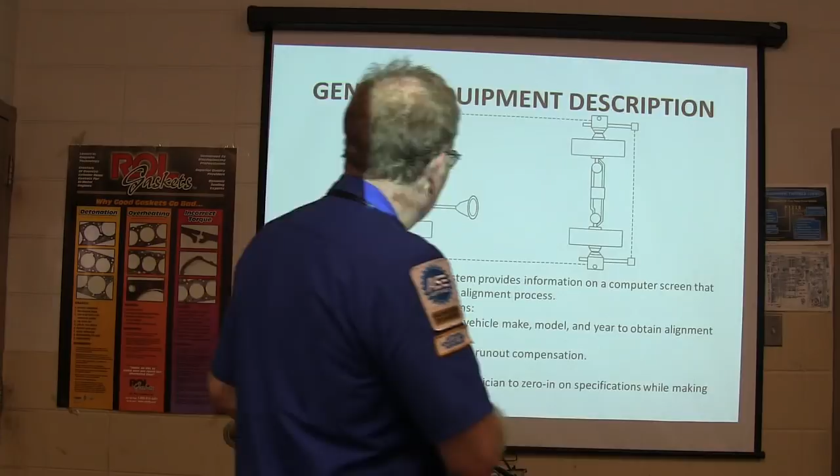This particular one shoots in a typical way, and on the one we got over there, if you've got a car sitting low enough where it can't see under the car, you basically block the camera from here to here, and then it'll ask if you want to lower the heads, 75 millimeters or 45 millimeters, so you can see under the car.

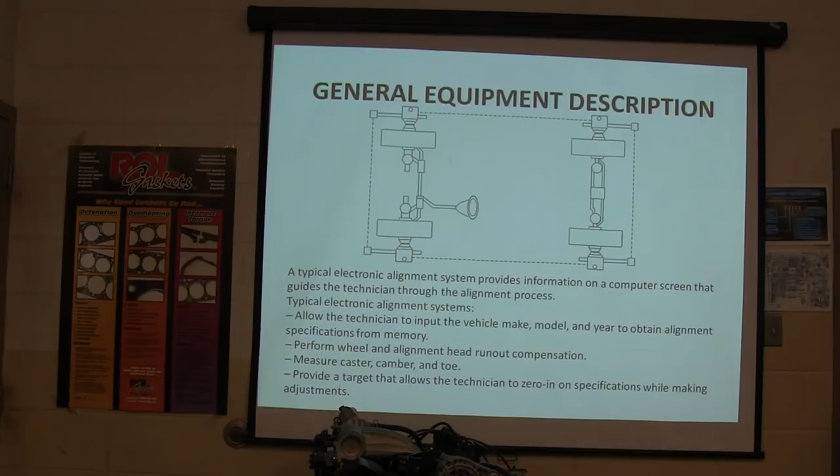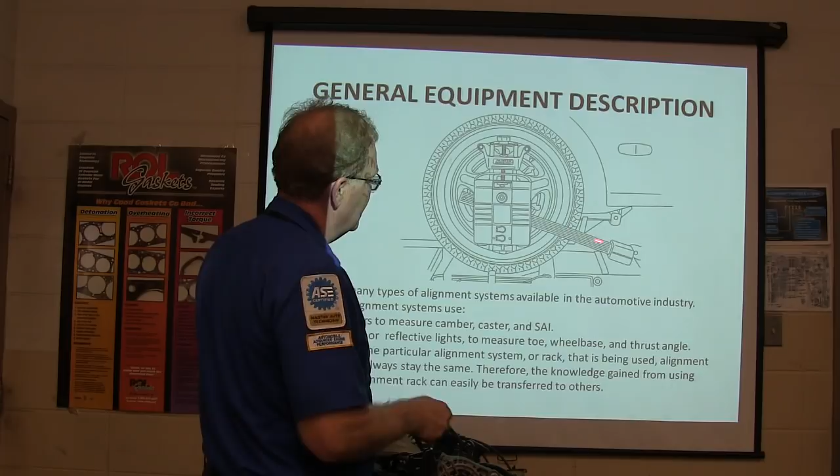Also remember, these are made for pretty big wheels, so if you're working on a car with really small wheels, mount the slide bar sideways, the mounting bar, so you're not fouled up on the bottom, because it doesn't know if it's sideways. It needs to be able to turn back and forth without interference on the turn plates. This particular Hunter one is designed so it's always shooting really low.

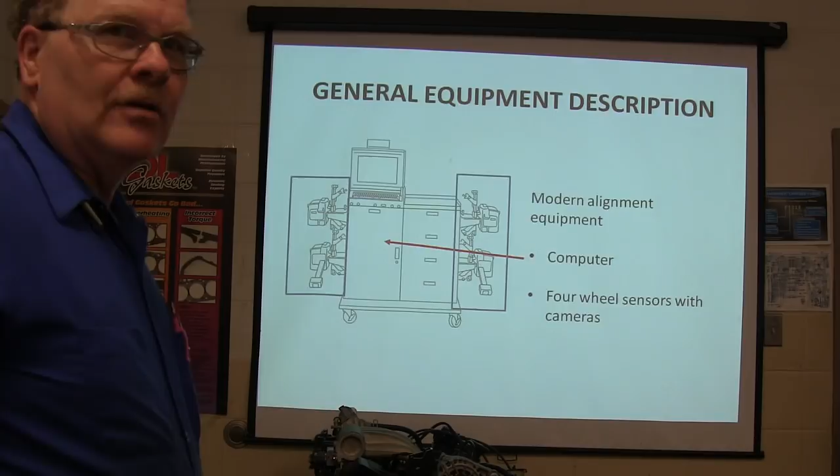Inclinometers measure caster, camber, and steering axis inclination. Steering axis inclination - you're going to draw a line through the ball joints seen from the front of the car, and that angle away from true vertical is what you're measuring.

Modern alignment equipment has got a computer in it, and the one I got over at the other campus in Geneva is basically a lot different from this one, but it works the same way. It's got Bluetooth communication between the unit and the vehicle.

You got these little mounts that you put on there. You don't even have the heads on the mounts - the heads are actually on charge on the machine, and they don't weigh hardly anything. You put these aluminum grippers on the wheel, tighten them up, then take this little head off the machine, unplug it, and just slide it on there. It's light as a feather, real easy to handle.

You can actually get alignment angles on a vehicle sitting over here in the shop, as long as it's within radio range. If you put those things on a car sitting on the floor, you can basically get alignment angles with it sitting on the floor.

It's a little easier to get turn plates under the front wheel. Now doing an alignment that way would be a drag, but I know of an oil change place where while the oil change is being done, his guy checks alignment angles on the car, prints it out, and hands them their alignment angles so they can get that seen about if they got a problem, which is pretty cool. Anyway, you got 4-wheel sensors with cameras.

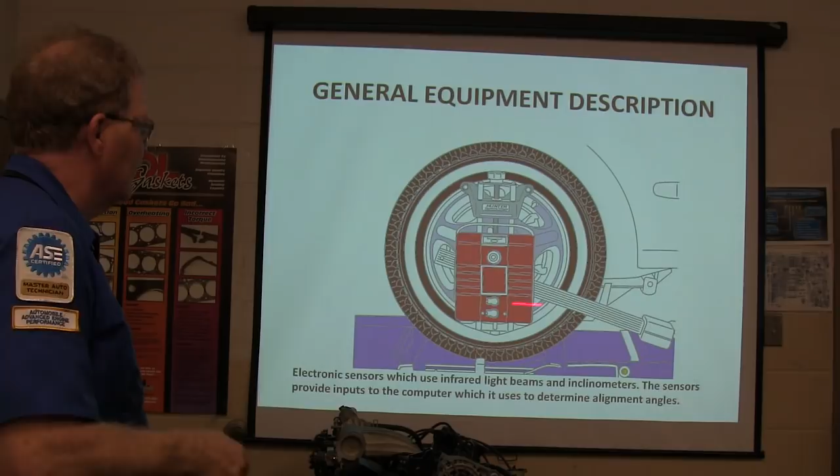Electronic sensors - some of them use infrared light beams. This is old terminology and all, so there's a lot of new stuff coming out.

This right here holds the steering wheel straight. If you fool around with the toe and don't put the steering wheel where it's straight, or if it's bound up a little when you're setting your toe, you're going to be going down the road on your test drive with a crooked steering wheel. Even if everything else is fine and the car is driving straight down the road and the tires aren't going to wear, and it's not pulling or anything, if the steering wheel's crooked, is Mama going to be happy?

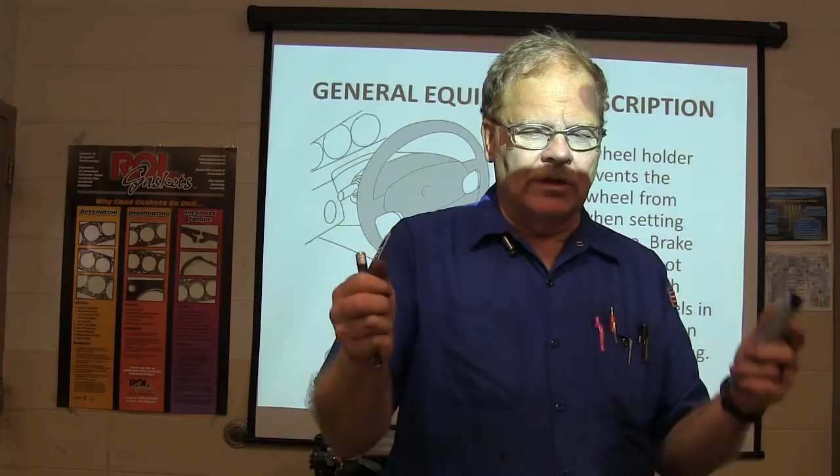That's how the Altima was when we first fixed it. The steering wheel was crooked. That's pretty bad. You got to make sure that when you put the steering wheel straight before you set your toe, it'll be straight when you're driving down the road. So it was turned, but the wheel's straight. Did y'all go back and fix that? Yeah, when we did the alignment, we fixed it. Oh, you mean when you first drove it after you put it back together? Yeah, okay.

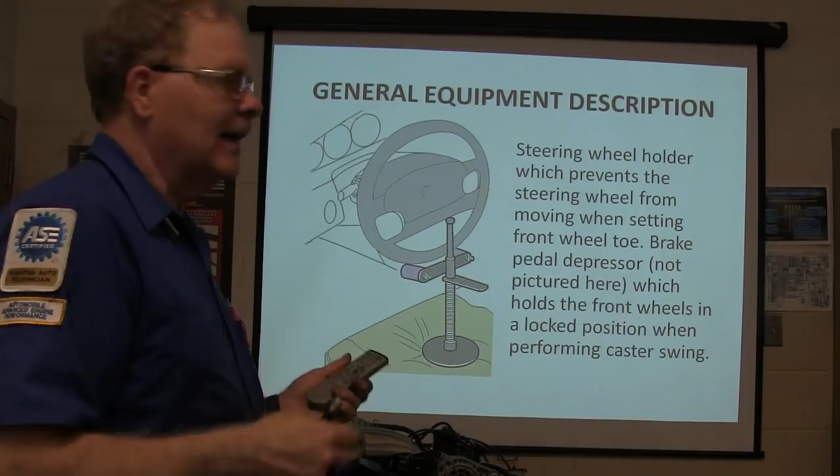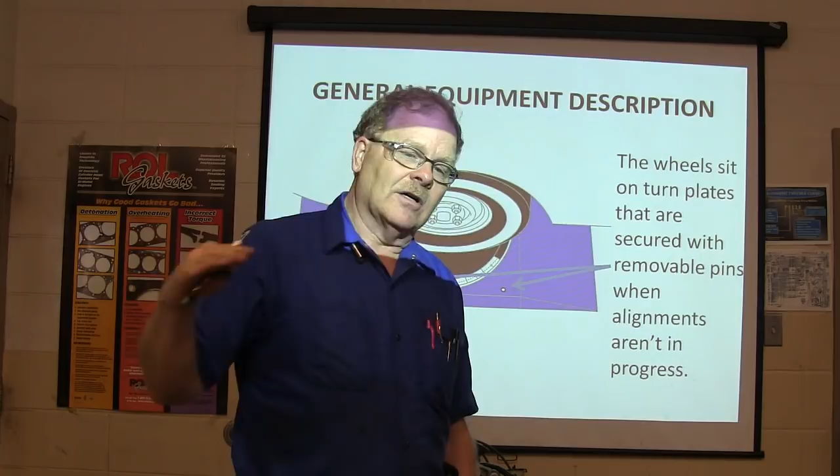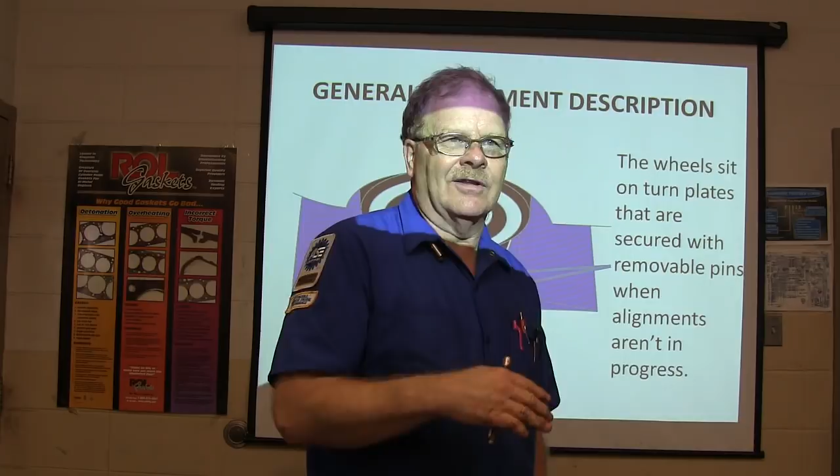The wheels sit on these turn plates that are secured with removable pins. Always remember to put your removable pins back when you're through with your alignment. When we pull the car up, we stop just short of the turn plates, leave the car in neutral, grab the wheel, roll the car over the turn plate, and then it's easier to pull the pins that way. If you drive the car onto the turn plate and hit the brakes, you bind everything up.

Turn plates have got bearings under them, so whenever you're turning your wheel back and forth, it's easy to do. And you can also get angle measurements by looking at the turn plates. They've got degree marks around here, so you can see how far you're turning it.

Turn off your programmed ride control before you're raising the vehicle with the air, unless it's on a drive-on lift. If it's on a drive-on lift, it doesn't matter. But if you're raising it off the wheels and you don't have that suspension off, what happens? You remember I told you this before?

Let's say you got one that's got air suspension on it, and it drives into the shop and everything's just fine. You raise it up without turning off the air suspension - it lets all the air out of the bags, because it thinks the car's riding too high. Then when you set it down, it squats down on the lift, and everybody laughs at you. I know, because I've been laughed at - that happened to me.

Also, it's really kind of dicey too. If you're just putting a jack under it and jacking it up, changing a tire beside the road for somebody, and it's a car with air suspension - like an Expedition, an Explorer, a Lincoln or a Crown Victoria - and you haven't turned off the air suspension, if it shifts a little because it's letting air out of the bags, can you see how that might cause a problem? Always think about that. Don't ever neglect it.

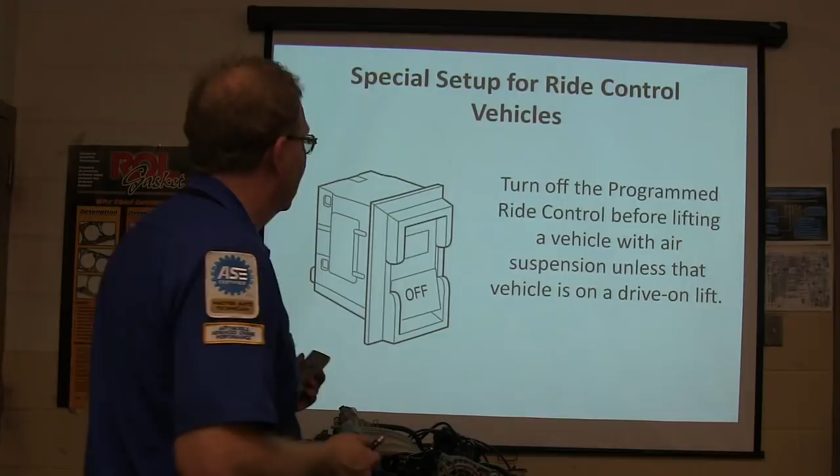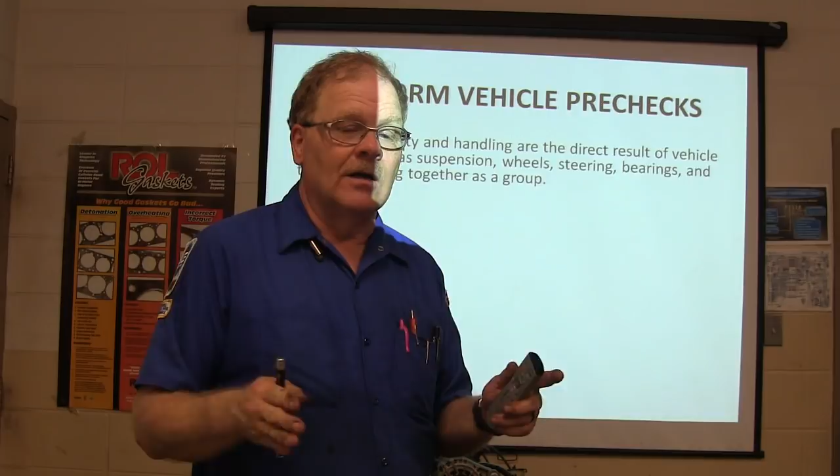Vehicle pre-check: vehicle stability is a direct result of vehicle systems such as suspension, wheels, steering, bearings, and tires operating together. Everything's got to be smooth and by the numbers. So you don't want anything wobbling over here that you didn't happen to notice, and then it's causing you to work really hard.

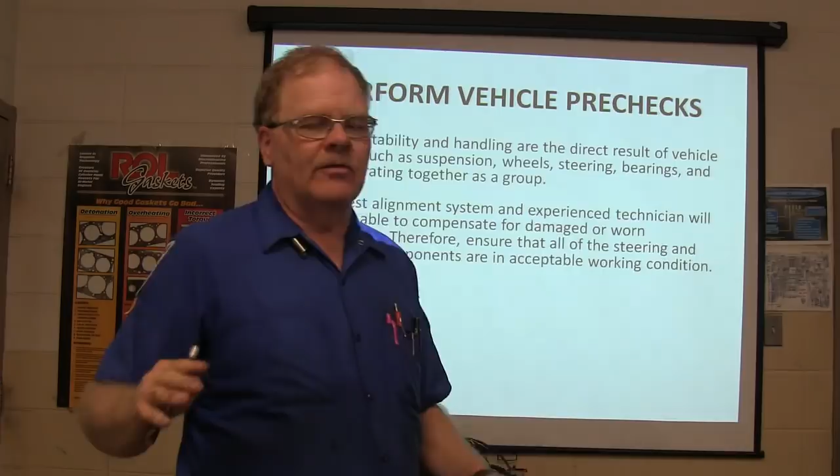You're never going to be able to compensate. By the way, the first thing you do before you start an alignment after you get it on the lift is check your tire pressure. Good answer.

Ensure all the steering and suspension components are in acceptable working condition, like those will be when you get through with the F-150 over there. Depending on the steps that were followed to verify the customer's concern - did you drive it and see how it felt? If they say my car's pulling to the right or left, the car wanders, or whatever else.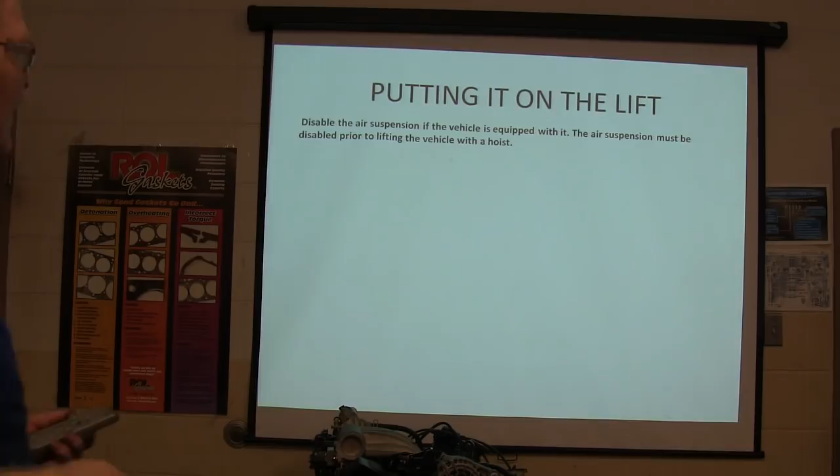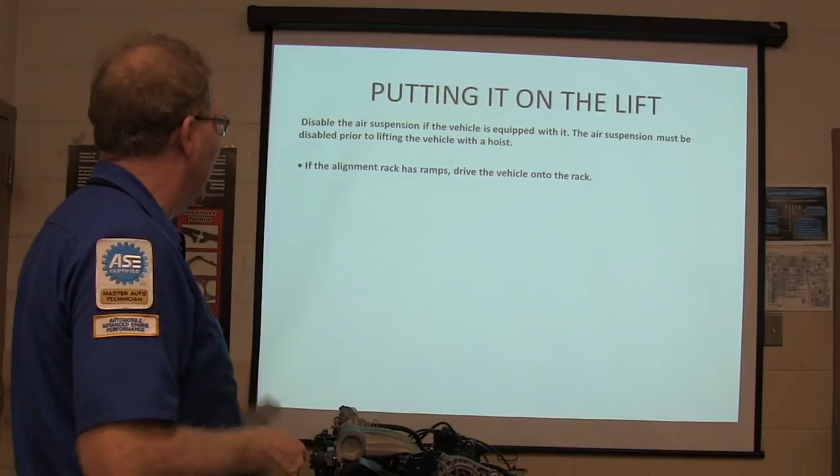The air suspension is not a big deal if it's a drive-on lift, unless you're going to raise the car up with those scissor jacks that the lift has with it. If it's got ramps, drive it onto the rack. The alignment rack uses stands to raise the vehicle with a hoist. Center it on the alignment rack.

It's got to be centered. Remember what we were doing yesterday? It wasn't centered on the alignment lift, and we were having some issues. The wrench was hitting it, see what I'm saying? So it needs to be centered up. And remember how I broke that aggravating nut loose? I found a 7/8 line wrench, put some valve grinding compound on it, went in there and broke it loose.

We got that, made it happen. Got to be centered to achieve your proper alignment readings. Each wheel on the vehicle has got to be directly over the center of the slip plates and turning angle gauges, right in the middle of those things. That's one of the reasons before you get to those plates, you can also move the plates over so that they're lined up with the center of the wheels when you roll the car forward. So remember that.

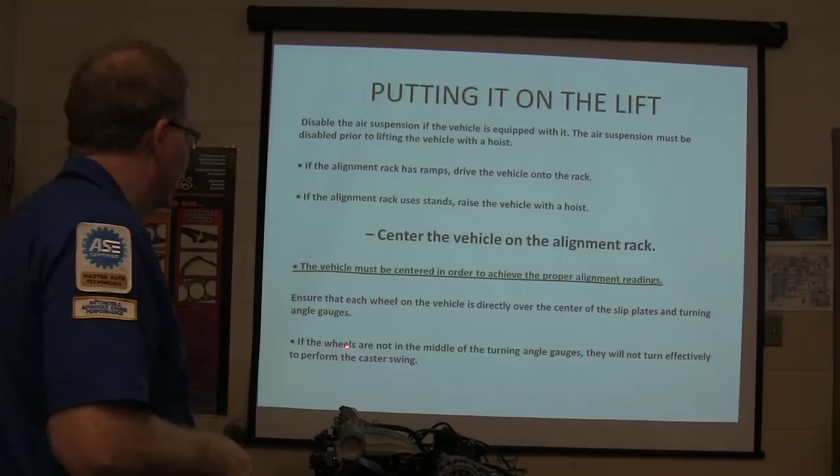If the wheels aren't in the middle, they won't effectively turn to perform caster swing.

All right, raise it off the floor. Now grasp the upper and lower, at the 12 and 6 o'clock surface of the tire. You got to have the tire off the ground to do this. You're going to grab the tire like this and like that. Now we've done this here before, haven't we? You grab it and it's going to clunk, clunk, clunk, clunk, clunk, like that.

You want to see where that clunk clunk is. Is it a bearing? Is it a ball joint? Turn it this way. Is it a tie rod end? Is it an inner tie rod end or an outer tie rod end? Because it can be either one. Inner tie rod end on a rack and pinion steering is up inside that boot, and that's that rod. You'll be selling those at the parts store with your $400 worth of stuff.

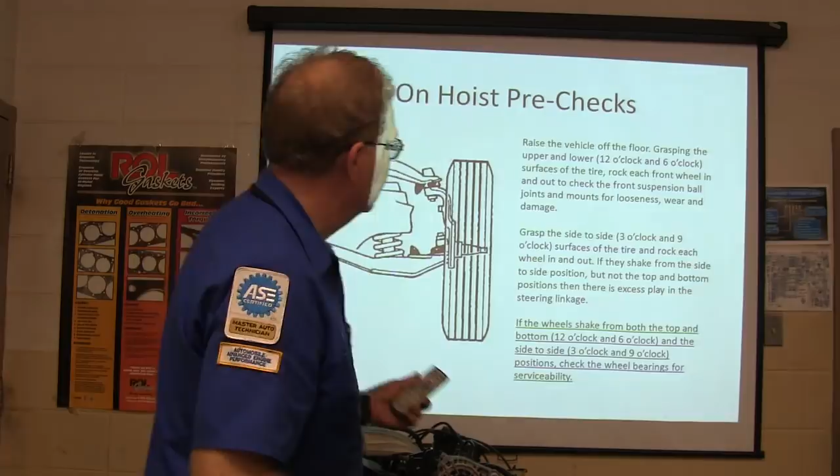All right, grasp the sides, 3 o'clock, 9 o'clock. Take them top to bottom. Check wheel bearings and other things. Loose suspension, steering nuts and bolts. See if the cotter keys are there. See if anything else is loose. See if anybody's been working on it and do it right.

See if something's bent. Check the steering gear mounts and rod connections for looseness. Whenever you move it, is the steering gear moving back and forth, or is it jiggling around?

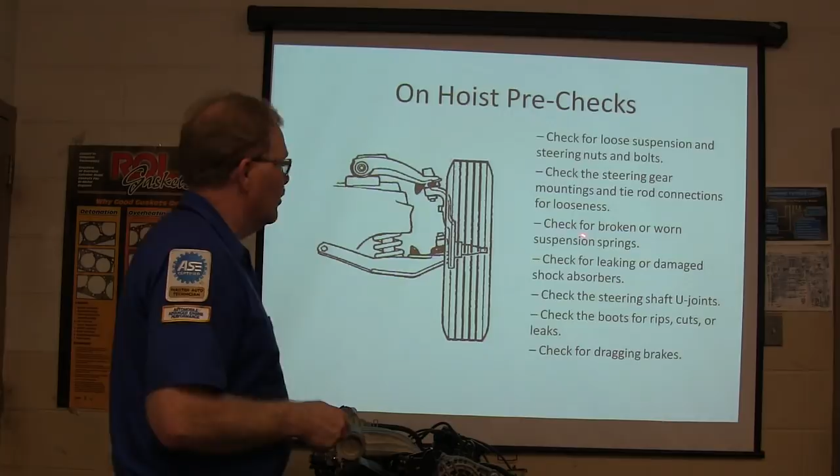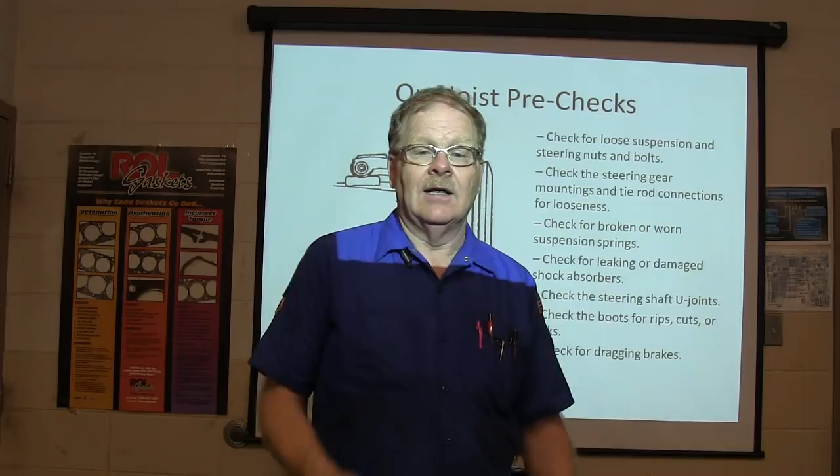Worn or broken suspension spring, leaking or damaged shock absorbers, steering shaft U-joints. I had a steering shaft on an Altima one time, with these little U-joints, like the little cross U-joints, whatever they call those. Anyway, I always forget the name of them. But when you turn the wheel, it's just like a regular U-joint on a car. It would go hard and easy and hard and easy, drive you crazy. I got that shaft over there somewhere laying on that thing, I believe.

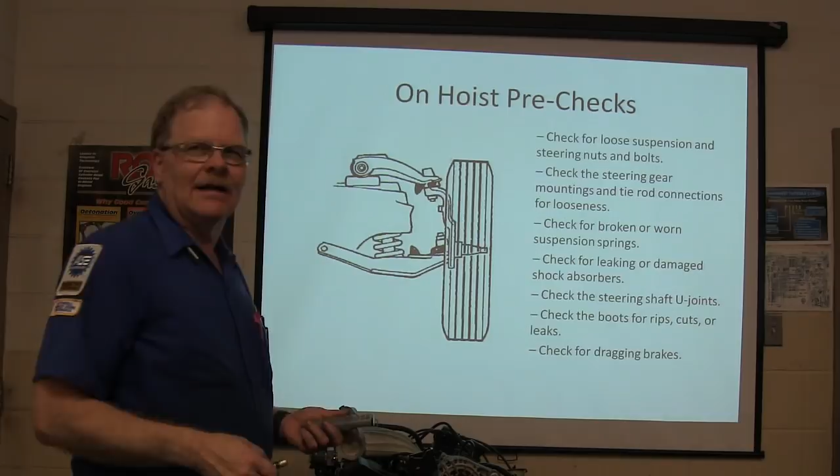And it flops easy one way. There it is, up there behind you, I think. Right up there, up, up, up, down, down, down. Second shelf in the middle, right there. Grab that.

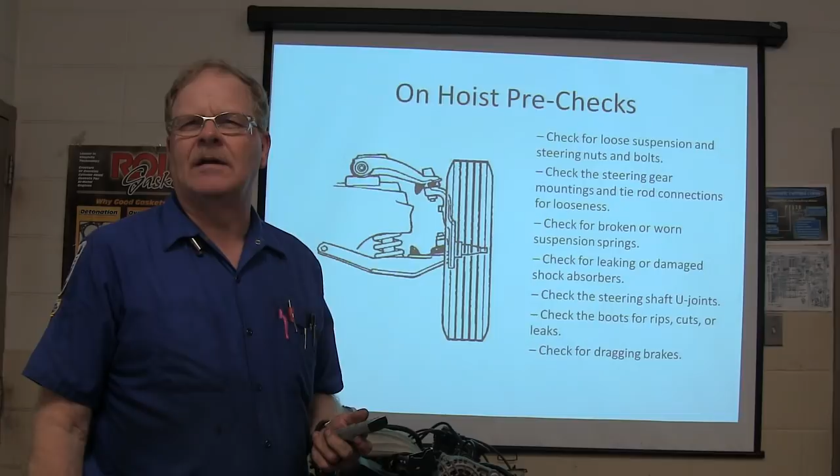Grab that and feel of it, both ways. That may not be the one I was thinking about. That is one, but it may not be the one I was thinking about. We got another one over there. Anyway, it ought to feel more or less like that. If one side is stiff and the other side's not, you'll feel it when you're driving.

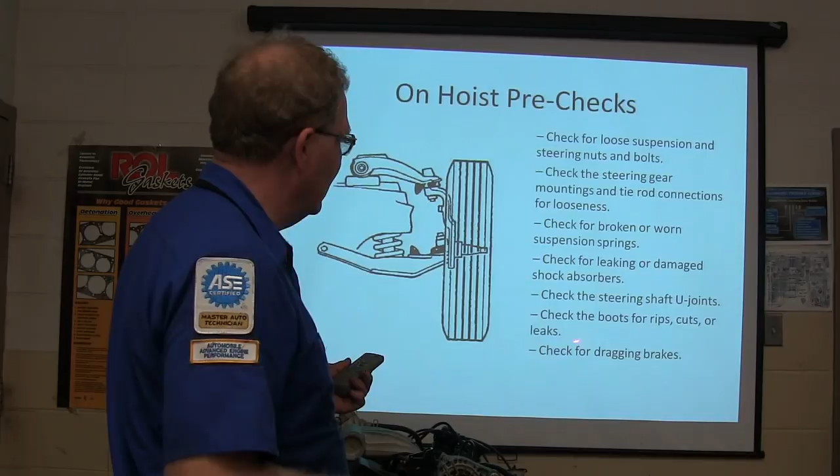Check the boots for rips, cuts, or leaks, and for dragging brakes. Ride height, suspension measurement from unsprung components to sprung components.

The car is sitting on springs. What's beneath the spring? The spindle, the tire, everything that's on the ground that's not sitting on a spring is unsprung. If it's sitting on a spring, and when you're bouncing the car, the part that's moving is sprung weight, and the part below the spring that's not moving is unsprung weight. Now don't confuse ride height and trim height.

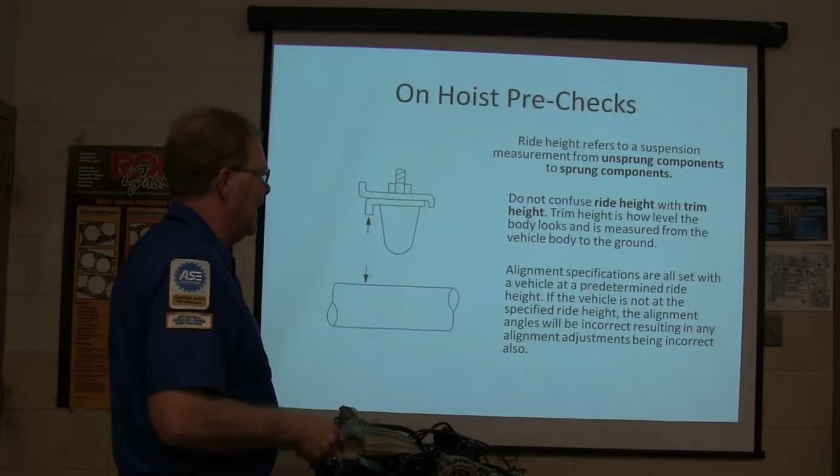Trim height is how level the body looks when it's measured from the vehicle body to the ground. Alignment specs are all set with the vehicle at predetermined ride height. If it's not at the specified ride height, the alignment angles will be incorrect.

You might notice on this front-end machine, the first thing it does is take you to a place showing you how to measure and what the dimensions are supposed to be at various places. It'll show you pictures, from here to here should be this much between this and this, showing you how to measure your ride height.

Refer to the illustrations on the alignment machine to determine which points to measure on the vehicle. What are the specs? What are the allowable tolerances? Overall side to side—is it an inch higher on this side than the other? That's important too.

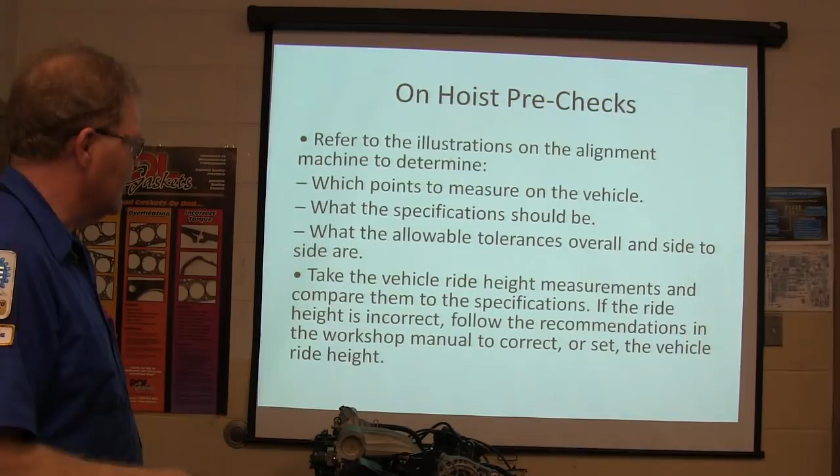Take your ride height measurements and compare to the spec. If the ride height's incorrect, follow the recommendations to fix that. If you've got torsion bars, it's pretty easy—you turn those torsion bars.

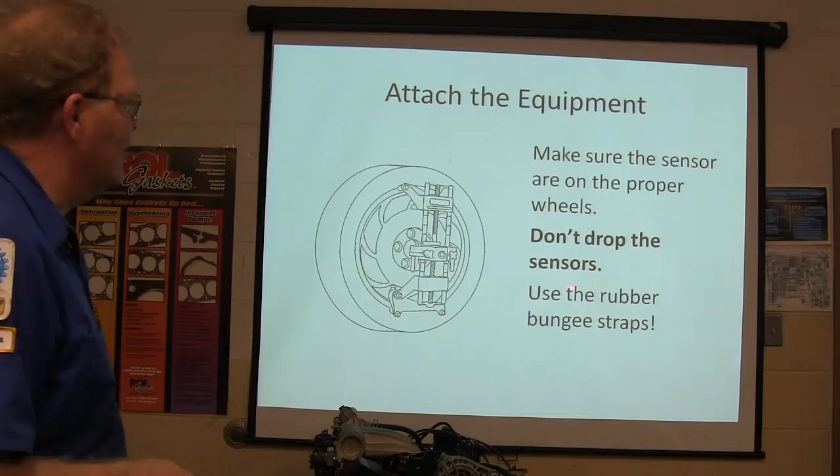Make sure the sensors are on the proper wheels. Don't drop the sensors, use the rubber bungee straps. Perform run-out compensation procedure for each head. This allows the computer to determine the total amount of run-out at the wheel hub, with the sensor located on the alignment head. If you don't do that, you may have issues.

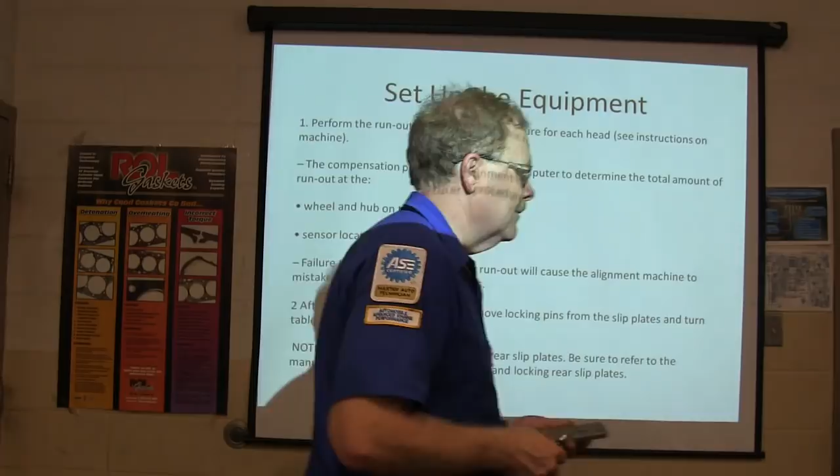The guy that sold us this machine said if they're aluminum wheels, you don't typically need to worry about that on a late model car, but you don't know if the wheel's bent or not, so there could still be issues. You go 45 degrees, level it, tell it you're going to do the next step, 45 degrees forward, level it—now it's measured the run-out compensation on all four wheels.

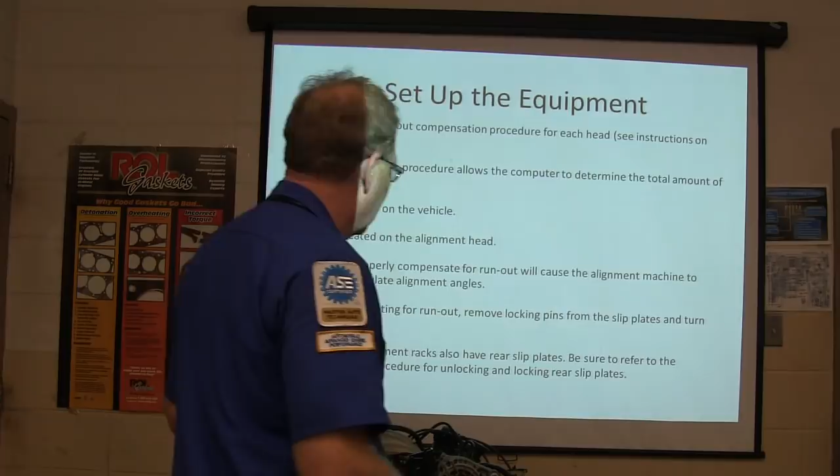Some machines have rear slip plates—ours have got rear slip plates. You can pull things in. If you're doing adjustments on the rear wheels, it's nice if the rear slip plates let the wheels move freely, so you're not dragging the tires on the metal.

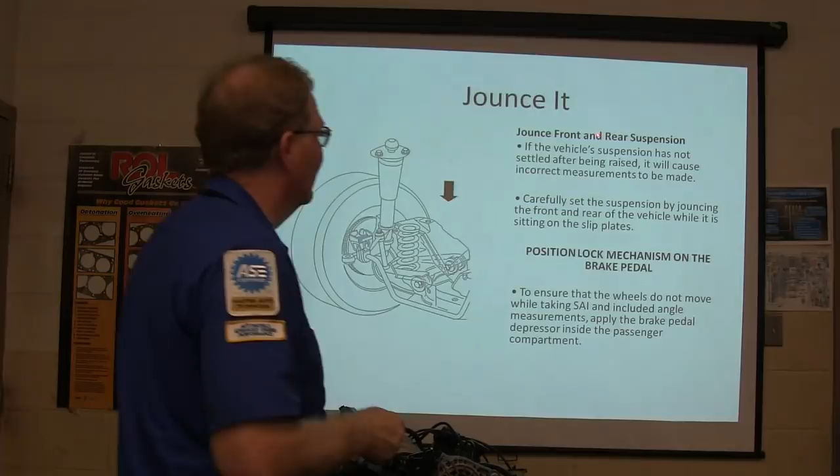Jounce it. Have you ever seen the little video on our machine where it shows you putting your hands on the hood and bouncing it, just letting all the suspension go right where it wants to be?

And do something for me—reach over there and take OJ's hat off his head and put it back on. Take his hat off his head and put it back on. All right, now put it back on his head.

So what do you think about that? When somebody takes your hat off your head and puts it back on, what do you do? You fix it. If somebody takes my glasses off my face and puts them back on, I'm gonna fix them. So it's got to be exactly like I want it to be.

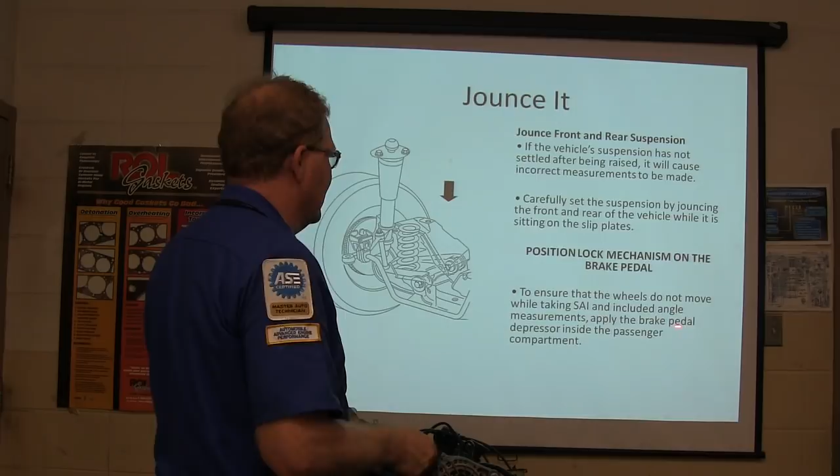Carefully set this as pictured. Position a lock mechanism on the brake pedal to ensure the wheels don't move while taking steering axis and included angle measurements—apply the brake pedal depressor inside the passenger compartment. I asked the guy that used to service one of our machines, do you need to lock the brakes or not? He said you don't lock the brakes unless you don't get readings you like, and then lock the brakes. He didn't really know.

It's unusual. Be sure the caster swing is executed from the steering wheel, not from a front wheel. A lot of guys just grab the front wheels and turn them to do their caster swing. It's a whole lot better to get in the car and do it that way, or reach in the window without blocking the beam.

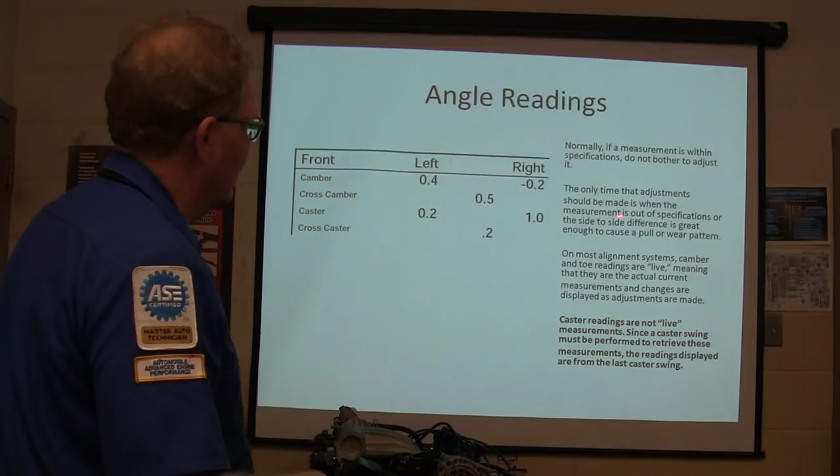If measurements are within specs, don't bother to adjust it. The only time you ought to make adjustments is when the measurement is out of spec, or the side-to-side difference is great enough to cause a pull or a wear pattern.

Did you hear what that said? You might even have some that are in the red, but you know, if it's not wearing the tires and it's not pulling, it's not worth fooling with.

If it's wearing the tires or pulling, you need to be worried about it. But you may have caster in the red, and you may have camber a little bit over, like we were talking about the other day. But if the tires are wearing good... whatever happens, you're supposed to start on the back wheel and go to the front.

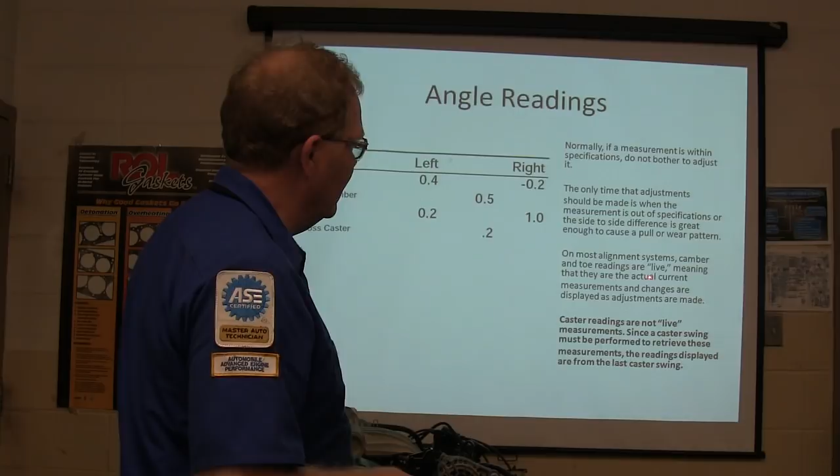On most alignment systems, camber and toe readings are live, meaning they show actual current measurements and the changes are displayed as they're being made. Caster is not like that. Caster readings will sort of give you an idea, but every time you adjust caster, you've got to go back and redo a caster swing to make sure you got it right.

Caster and camber should always be adjusted first and toe last. Caster, camber, and toe—can you remember that? Caster, camber, and toe. That's because adjusting toe does not change caster or camber, but adjusting caster and camber will change toe.

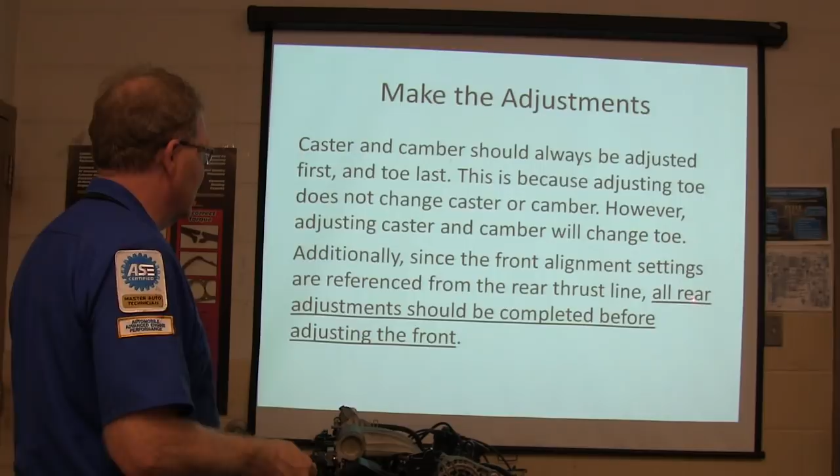If you set toe first, you do extra work. Since front alignment is set to reference from the rear thrust line, all rear adjustments should be completed before adjusting the front.

Sometimes it gets really irritating because you adjust the toe on that side, and it's just like it ought to be. Then you go to the other side and adjust it, and it moves the other one. So you've got to go back and forth with it.

Some of them have a rear camber and toe adjuster, and that's really common on a lot of cars—they'll have that.

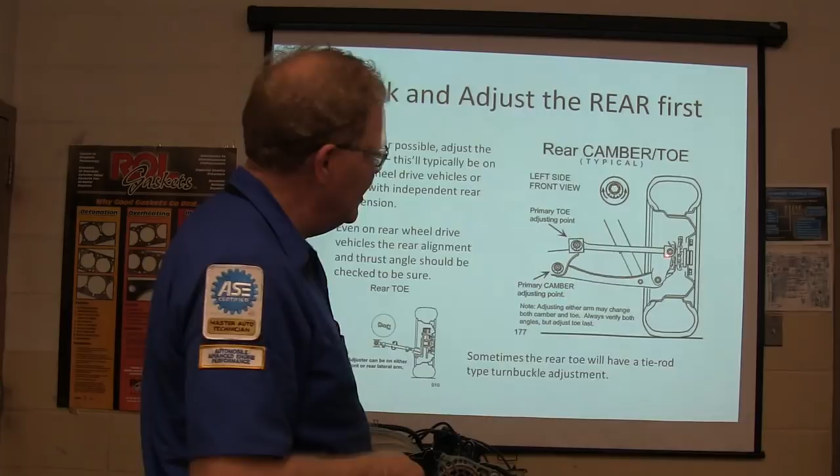On some cars, I've got a picture in a minute, they'll have these little adjusters. Some of them, if this right here won't do the job, or if there's not one, like on some Honda Accords, you can buy an adjustable link where you can adjust camber, and it acts like a turnbuckle. I put some on a Dodge Neon, and man, you can do some heavy-duty adjustments with those. It's easy to do, too.

But there's your camber, and there's your toe. See, the one that's on the front is going to be doing that.

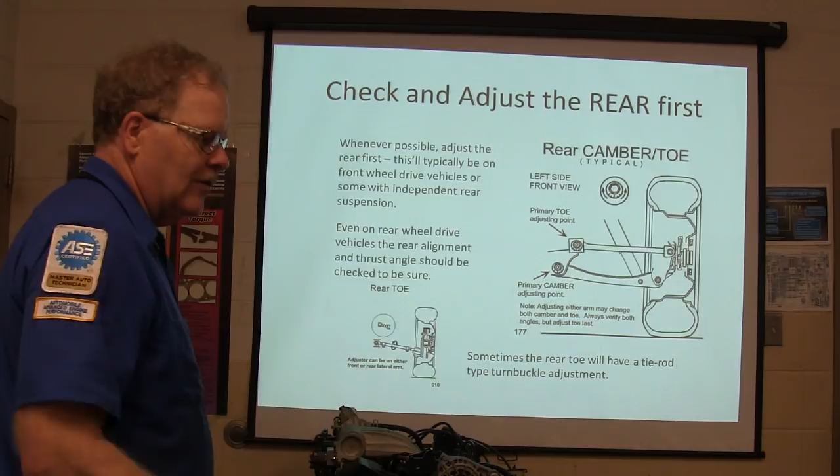Even on rear-wheel drive vehicles, rear alignment and thrust angle should be checked for sure. Even if you've got a vehicle with a solid axle on the rear end, you need to make sure.

You ever see elongated holes? You saw that this morning on that truck y'all are working on—it's got them like that. When you're getting ready to take these out, if you'll spray some paint on here so you'll know right where they go back and put them right back there, you're in better shape.

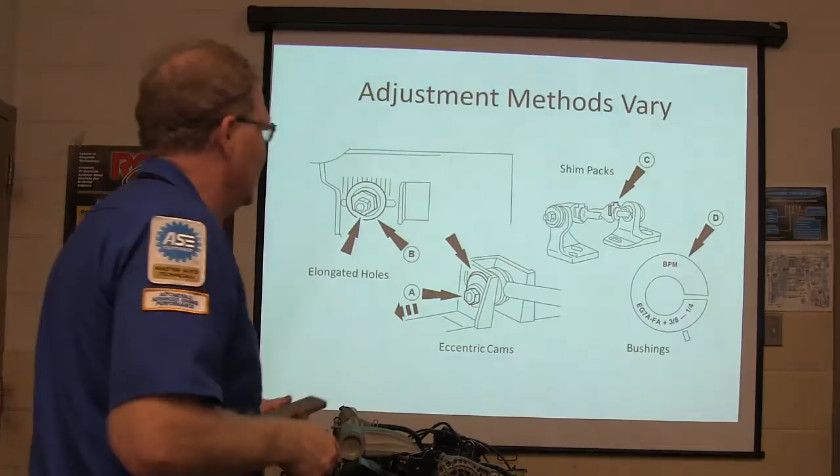Some of these, like the Bronco, have these little egg-shaped bushings that you've got to put in there. Some of them have got eccentrics. I love the ones that have the eccentrics on the lower control arm—handy as a shirt pocket, easy to get to, you're right there.

The ones I like the least are the ones with the stupid shims on them. I've never really liked those, but people did them for years.

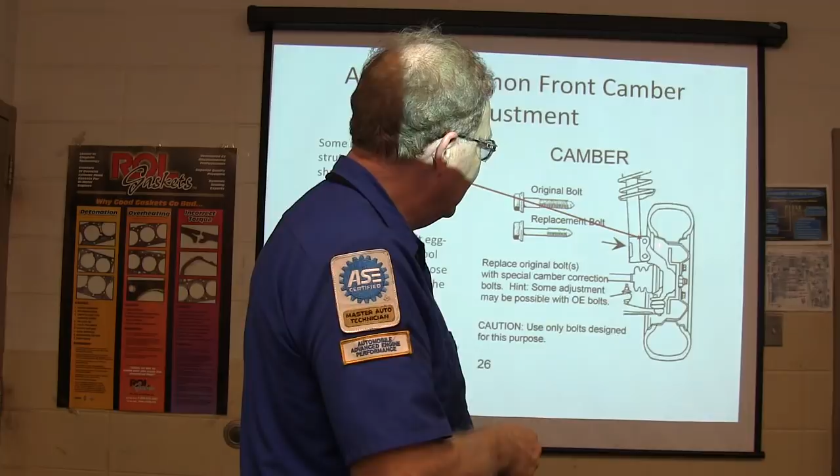Now, some replacement struts have egg-shaped holes right here that allow camber adjustment. A lot of them don't. We had a Mustang in here that we absolutely could not adjust camber on before we took that strut off and egg-shaped that hole a heck of a lot.

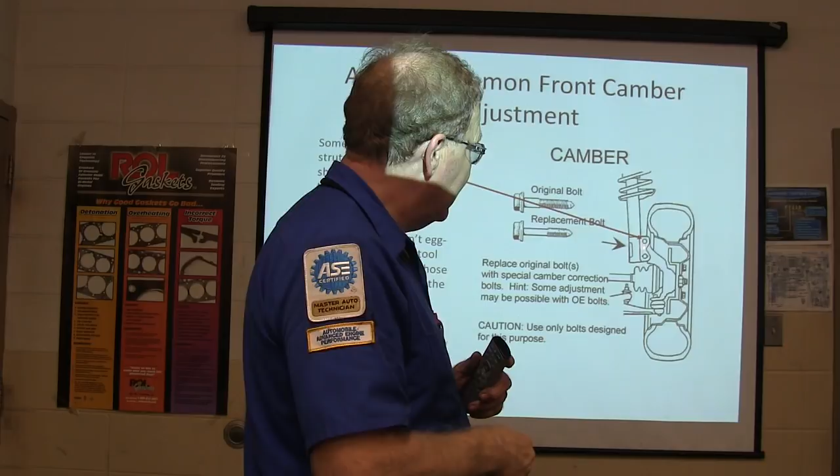You remember that gray one? It was wearing tires out really bad. We egg-shaped the hole and managed to get it so it looked like it was supposed to be, and replaced the original bolts with special camber correction bolts. Some adjustment may be possible with OE bolts, but they have egg-shaped bolts you can put in there so you can turn it and move it, but it doesn't move a whole lot.

Some vehicles with rear camber adjustment use eccentrics, and some like Hondas require the purchase of special turnbuckle links. There's all kinds of stuff manufacturers have come up with to adjust things on a vehicle that doesn't have it. On your Tauruses and stuff, you actually have to drill out the rivets in the top of the strut tower to set camber and caster, which is a bunch of aggravation.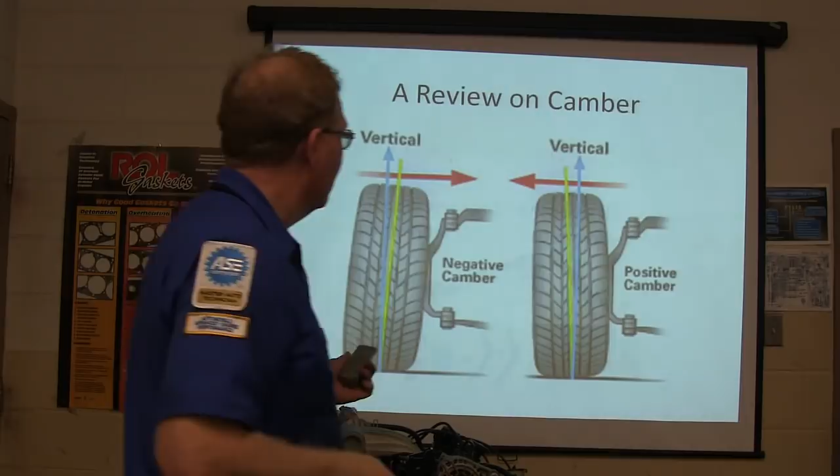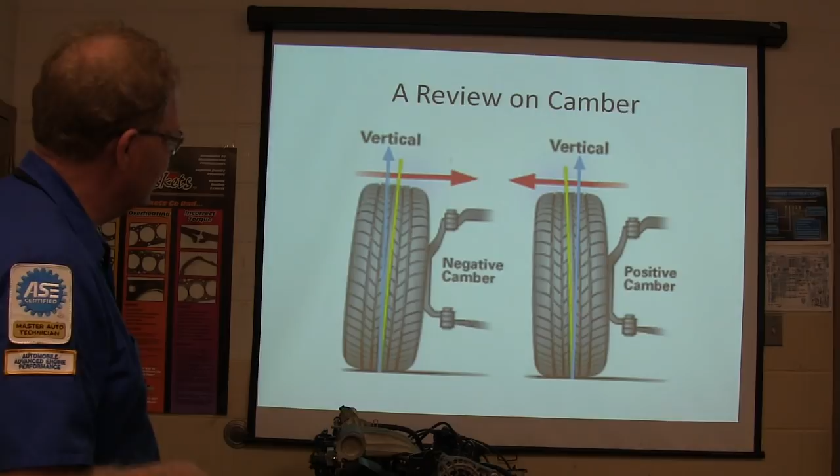All right, review of camber. There's your vertical line - that's negative, that's positive, right? Positive is leaning out from the inside, negative is leaning in. See that? Here's your steering, here's your ball joint.

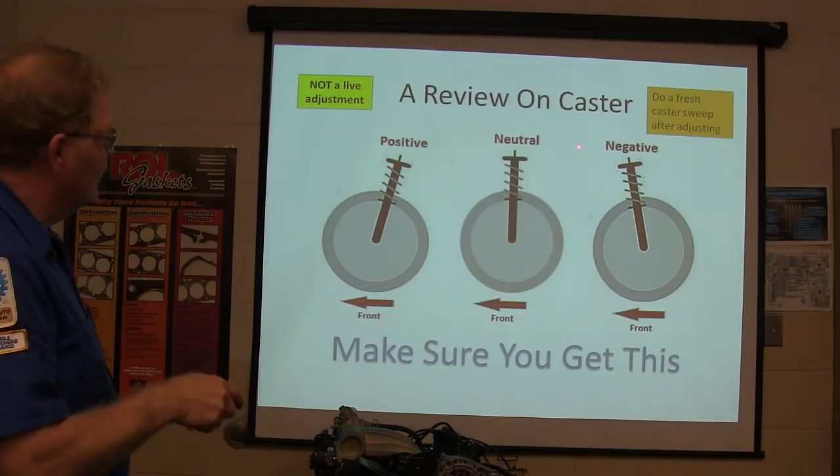All right, a review on caster. Make sure you get this. Positive, neutral, and negative. Now this is the front of the car, okay? Positive caster, neutral, negative caster. The positive caster is what helps it return to center after you turn.

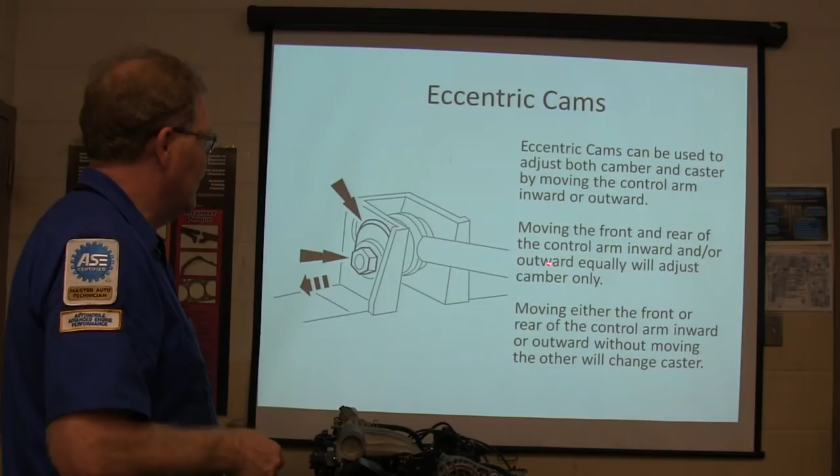See what I mean? All right, eccentric cams can be used to do caster and camber. Move the front and rear of the control arm inward or outward equally to adjust camber only. If you move either the front or rear by itself, that changes caster because it moves the relationship of the upper ball joint to the lower one.

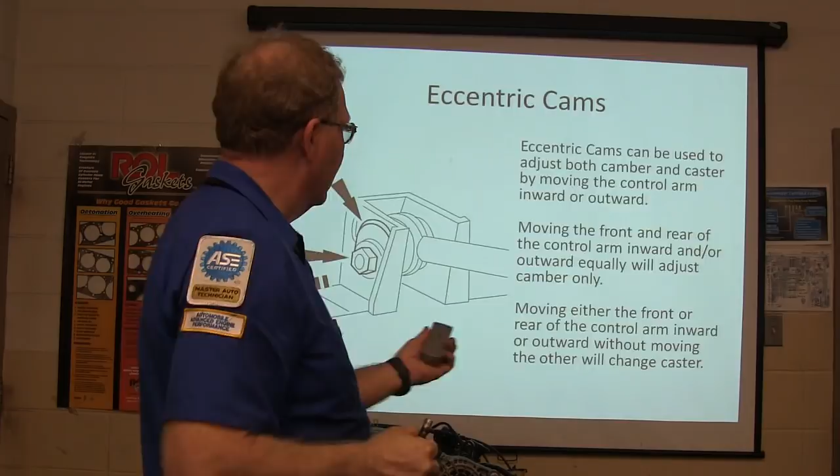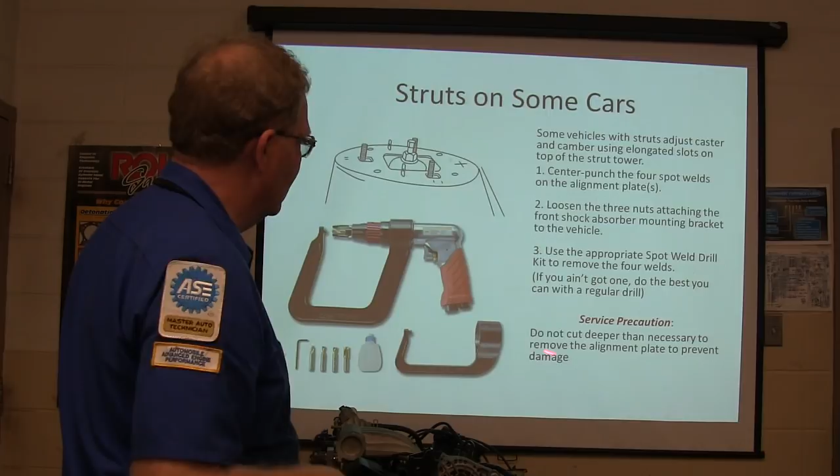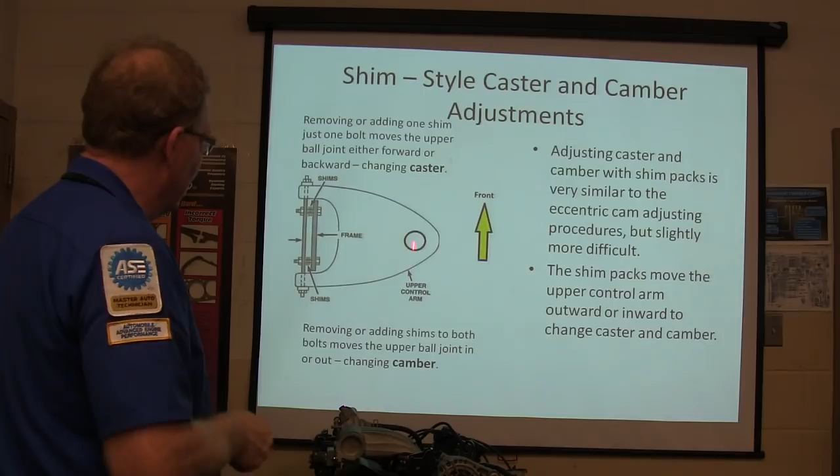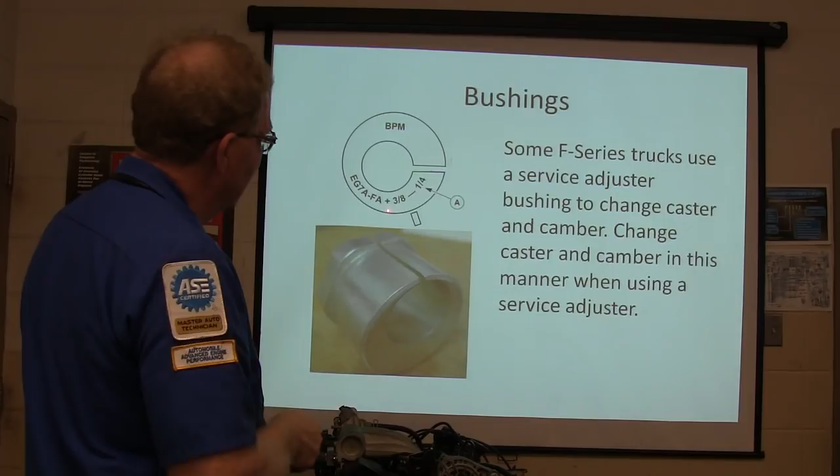Some F-Series trucks use a service adjuster to change caster and camber, and they have different degrees, you see - they'll be stamped on it. The one they put in there at the factory is actually so it can't be moved. It'll have a little dog on it.

Start the engine, center the steering wheel to adjust toe, make sure it's where it wants to be - don't want to be bound up, right? Turn it off, hold the steering wheel in a straightforward position, attach the steering wheel cover, check the toe settings on the alignment rack, hold the tie rod in while loosening the nuts, clean and lubricate the steering linkage and tie rod end threads. Sometimes you got so much dirt in there you got to brush it off, it's aggravating. Tighten the nuts, recheck the toe setting.

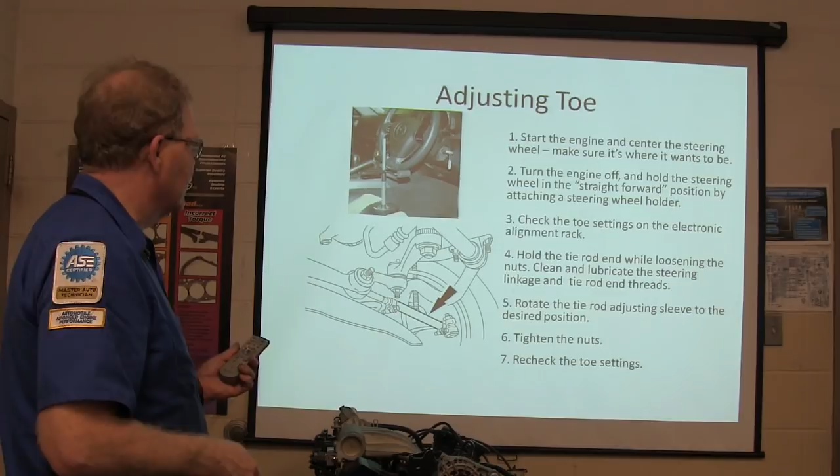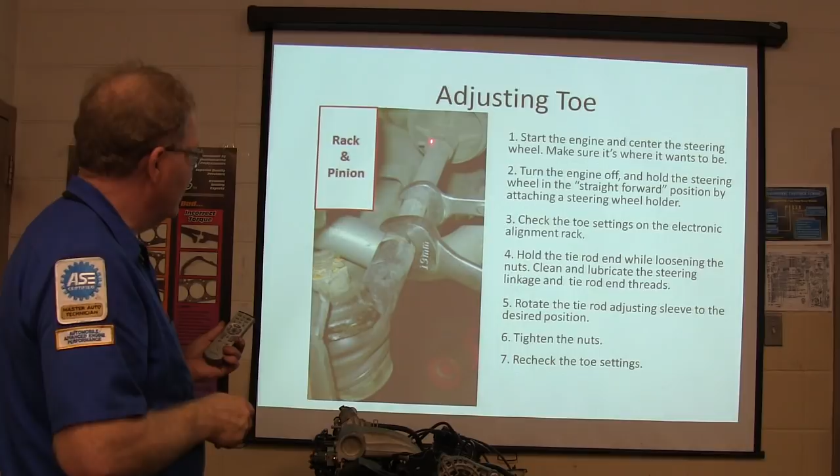Start the engine, center the steering wheel, same thing again. It's all the same words, but you can see what we're doing here. A lot of times you have wrench flats on that little tie rod. Sometimes you may need to squeeze that clamp and break it loose where it'll turn without twisting that boot up. Make sure the steering wheel is straight when you're driving it afterward.

Nobody likes it if their steering wheel isn't straight - they will bring it back. That's why it's important to test drive it. And that's pretty much all of it. There will be a pop test on this. You gonna remember it? You're not gonna forget all that stuff, huh?